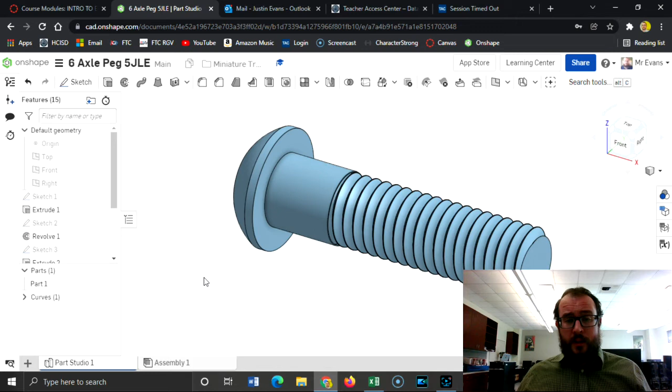Today we're going to make the axle peg. It's this screw looking one, part number 6. In order to make it, we're going to do a few new things here. We got to be able to put threads, which is the most notable one, and to put a hexagon shape, which should be pretty easy to pull off. But we're going to mix together several things that I've already taught you and a few new things on top of that. So let's make sure that you're inside of your miniature train folder.

Create a new document, of course.

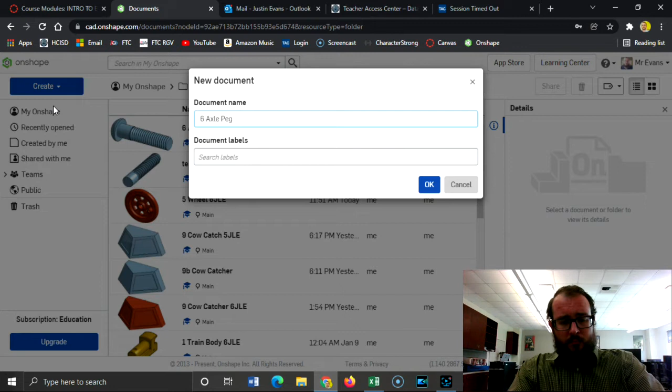Now we're going to want to start our sketch on the front view. And I want to put a circle right on that origin. It needs to be on that dot right there.

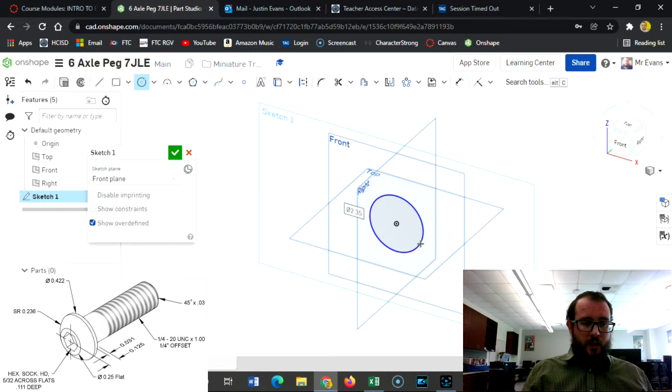Now, if I look at it, it doesn't look like it has a diameter call out, but if you look in that corner, it says 1/4-20 UNC times 1.00. That's the diameter, 1/4. The 20 UNC refers to the threads. So the length of that thing is 1 inch. So that's 0.25, the diameter. And then we're going to click the green check mark and extrude that.

It should automatically select it. Now, I extrude it 1 inch because that's the full length of the shaft of the little screw, that peg there. But if you notice, it says 1/4 offset.

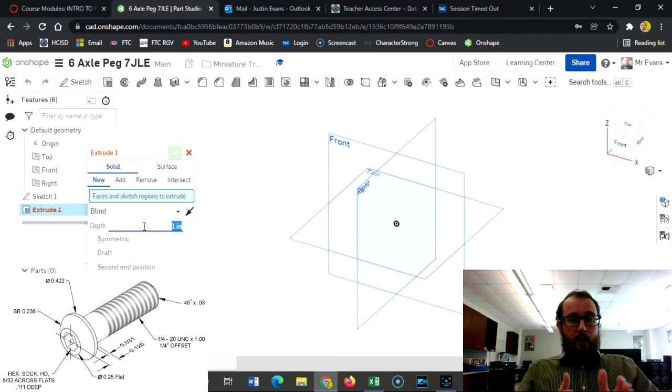And if you look at the picture, there's a part that doesn't have any threading on it. I have it right here. There's a part that doesn't have any threading on it here, and then it has the threads here. So in order to match that, let's only extrude out 0.75 because 1/4 of it isn't threaded and 3/4 of it is, and that would be 0.75 an inch.

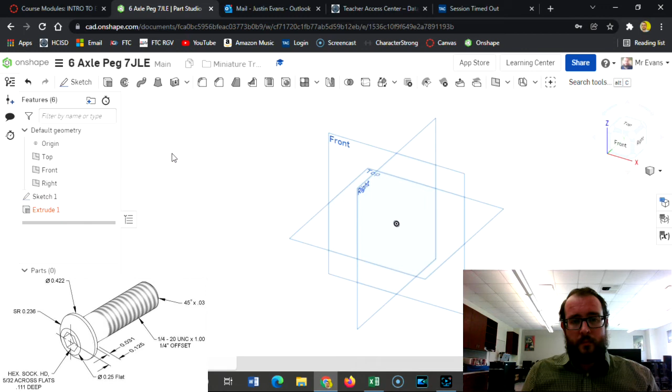Oh, I forgot to select the circle. There we go, it didn't auto select it for me.

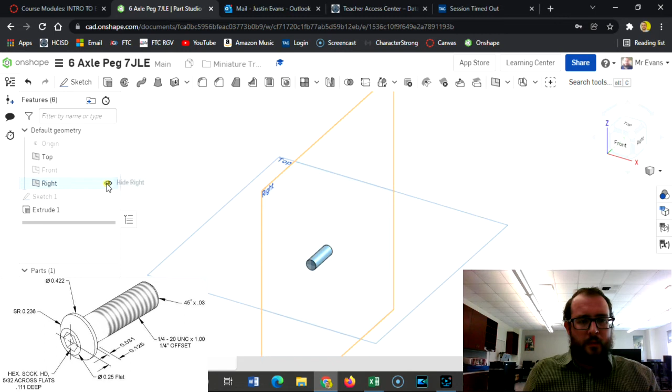I think I'm going to hide some of the things there. I think I'm going to keep the top. Yeah, I'd like it like that a little bit. So I could zoom in a little bit closer.

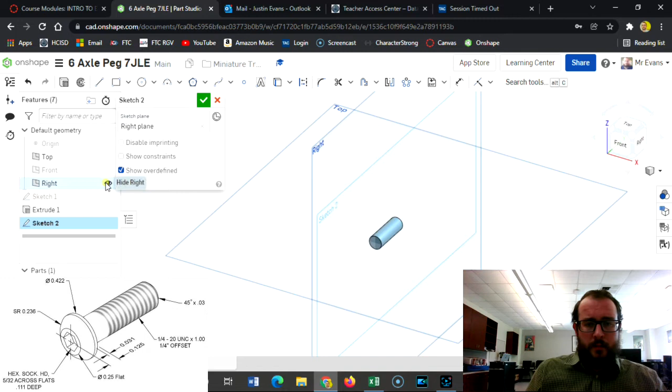Now the next thing I'm going to need to do is add the threads. So this takes a little bit of thinking. Actually, I need to bring back the right view here. I'm going to put a sketch on the right view. And I'm going to hide it again. But here's my sketch.

And I'm going to draw. I'm going to click on this. I'm going to hover over the edge, right click, and click use, so it uses that edge. And I'm going to draw a triangle.

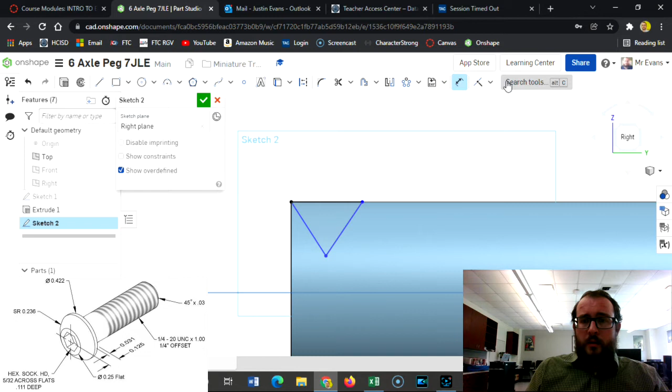Now don't let it make that, don't let it do a 90-degree triangle. This is going to give you some problems. It's going to end up being an equilateral triangle. So let me set this to equilateral by saying all sides are equal. So I click on the equal button and I click all the sides and make them equal to each other.

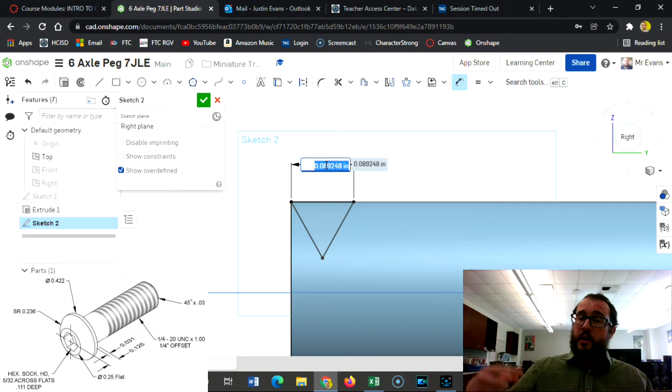And now let me tell them what size that needs to be. So this is what we need to think about. It says it's 20 UNC. That means it makes 20 spins in a 1 inch length. So that would be 1/20th, every spin would be 1/20th down an inch. So that would be 1 divided by 20, that would be the size, so 0.05.

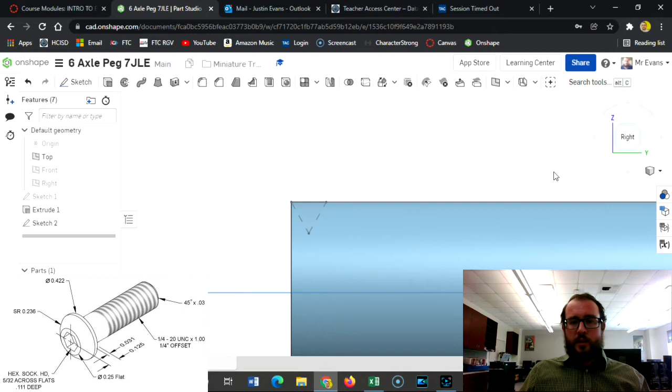There's our shape. Make sure it's clicked right at the beginning here. And then I'm going to hit the green check mark. I'm going to click the corner here so I can kind of look at it at an angle.

Now, where the little plane button is, I'm going to click the arrow down and click this button called Helix. I'm going to click on the surface here. See how it puts a spin on there?

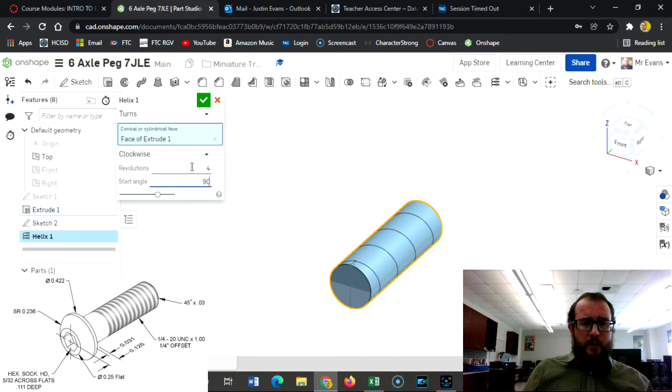I want the spin to kind of start about where my part is. So I'm going to put a 90-degree start angle. Yeah, see how it's... I'm trying to get it to start where my triangle starts. That I think I would prefer that.

Clockwise is fine. Now, how many turns do I want it to take is... So, if it makes 20 of them, and this is 3/4 of an inch, it's 0.75, that's 3/4. So I would take 3/4 of 20, which would be 15.

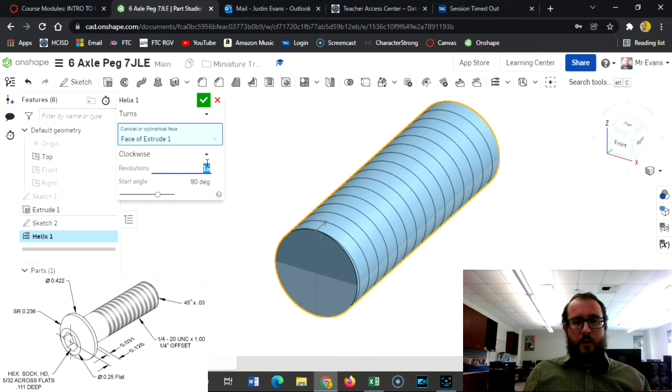I'm still going off of the 1/4-20 UNC thing. Now, unfortunately, I haven't introduced this next tool to you. It's called Sweep. Sweep takes a profile and a path, and it takes that profile and follows the path, like a spring is what we're going to make here.

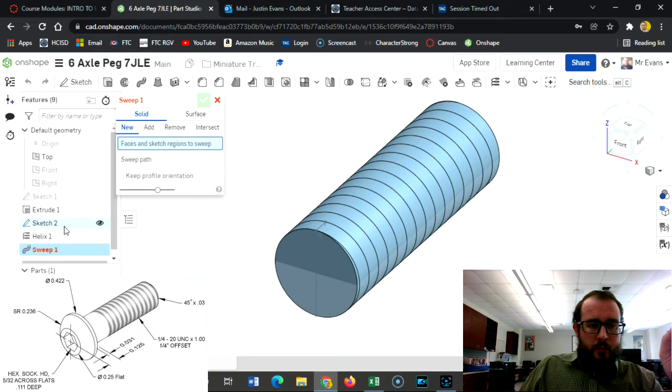So I'm going to click on this button right here called Sweep. And I want my sketch, so let me try it. Can I zoom in and get it? If not, I'm going to just click on Sketch there, and hopefully that works. And then for my sweep path, I'm going to click on the helix we just made. I want this to be a remove, and hopefully it cooperates with me.

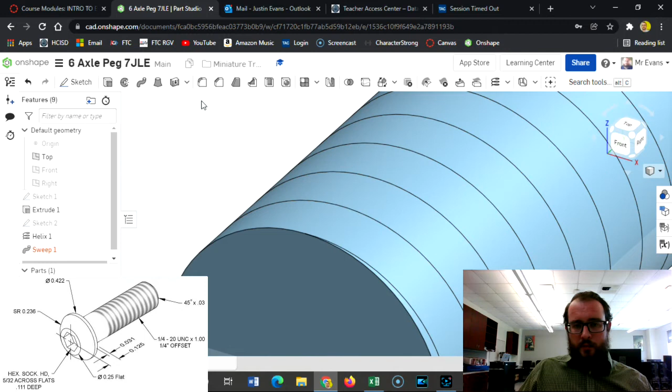Nope, something went wrong. Let me go back to the original sketch. I think I know what's wrong. I'm going to put a new dimension from here to here—it should be 0.125. And I'm going to delete this line here, I think that one might be making trouble. So let me get rid of that sweep and try it again.

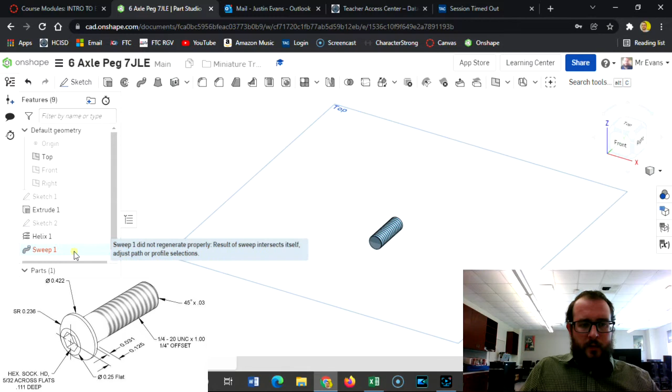So, sweep, sketch 2, and the path is the helix, and we want it to be a remove. Merge with all, maybe?

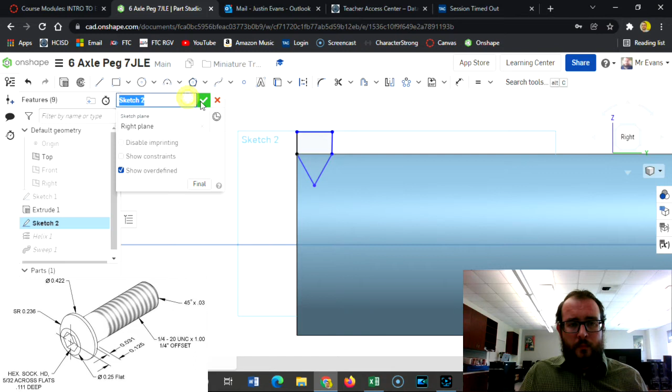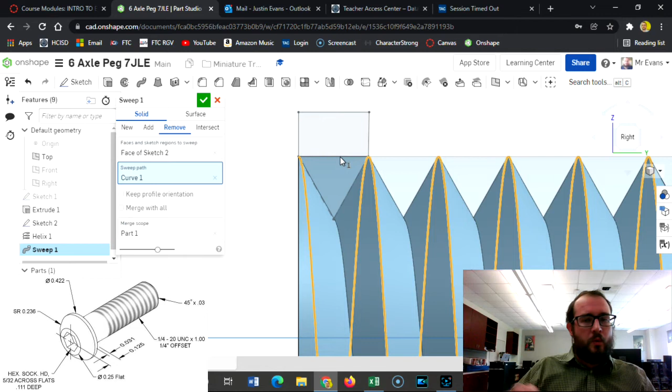Okay, so I'm leaving this in the video so that you can see that there's ways of problem solving. It looked to me like because it was on the surface, it was giving it some trouble, so I went back and added a little height to it so that it can cut out and look nice.

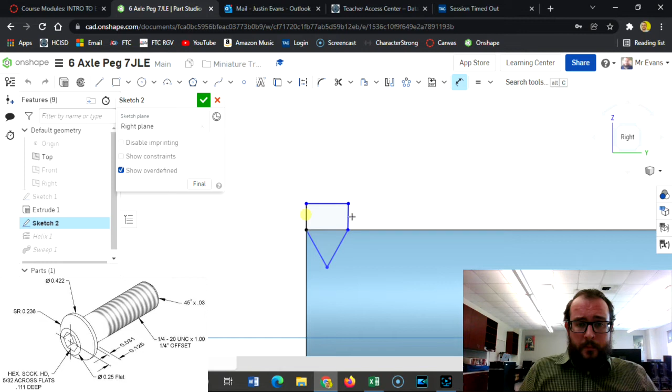Now, you can kind of play around with this a little bit, and let's say on the sketch, maybe I don't want the points to be so pointed. What if I made them—oh, let me fix that.

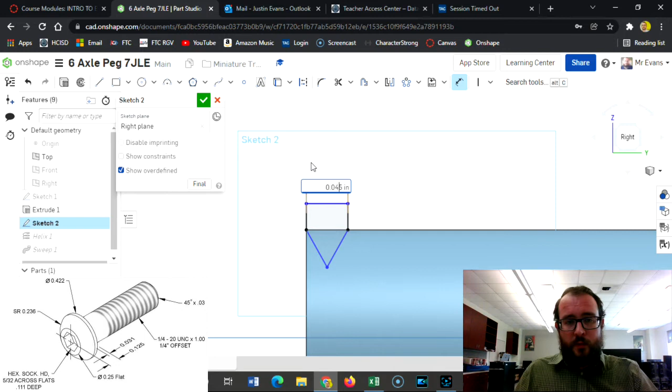What if I made the points, instead of 0.05, slightly smaller? Let's say 0.045. See, it gives a little bit of a flatter edge. So you can kind of mess around with that number in your sketch too, and change it around a bit depending on how pointed you want it to be—it's up to you. But 0.05 is for sure good.

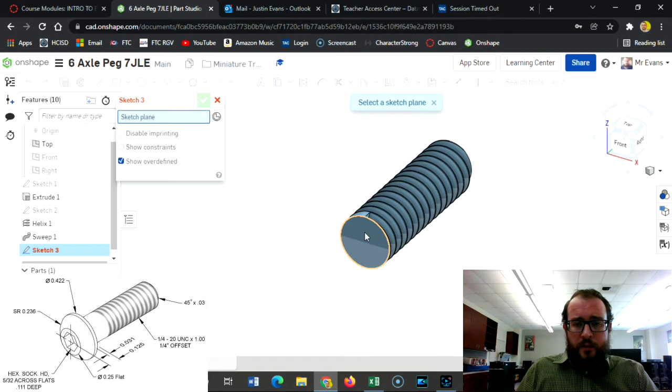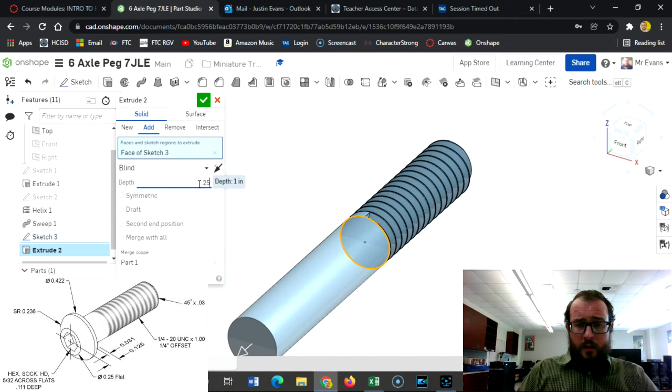Next is to create a sketch on the surface here, and we want to continue with that offset. So I'm going to get the very middle of this and make my circle 0.25. And I want to extrude that—whoops—1/4 of an inch. This is my 1/4 offset that you see with the call-out for the thread type.

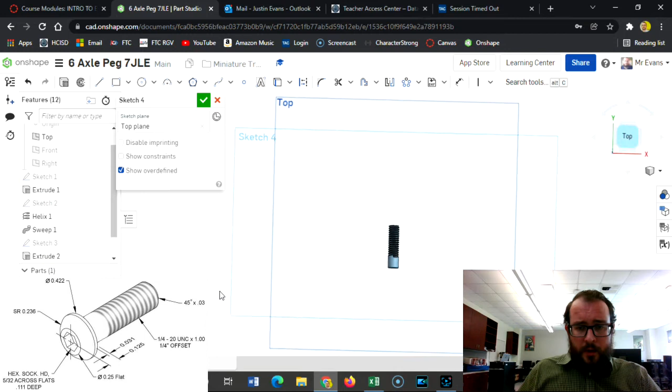All right, pretty close to being done. Now I want to create a sketch on—I can put it on the top or the right plane, I think. I'm going to put it on the top because that's the one I haven't hidden yet. And I want to click here, right click, and do use.

And I want to put a line in the middle of it. So what I want to do is make the head of the bolt, and it's kind of dome shaped. So it has a flat part going up, over, and a flat part here. Let me kind of work on my numbers. And then it's got an arch—let me do a 3-point arc again.

We'll just put anything for right now, kind of get a general shape. Oh, you know what, I need to back up on that. I made a mistake, maybe you saw it—I needed to go further out. The head of the bolt should go much further out, right?

There we go. Now I'll put my 3-point arc somewhere—I'm not exactly sure what it's going to look like, but something like that. And let me start adding in some numbers here.

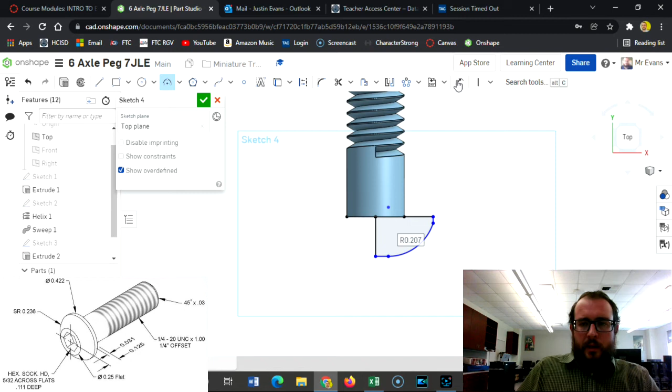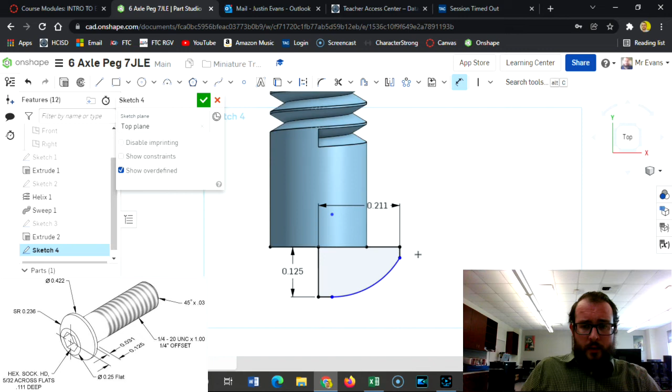The head of the bolt, if I look at it, has a diameter of 422, so 0.422, that's divided by 2 because this is a radius. All right, the height of it here is 0.125. The height of this little edge is pretty small—it says 0.031.

It says hex socket HD, 5/32nds across flats. There's a little symbol showing diameter 0.25 flat. So this right here is a diameter of 0.25, so half of that, 0.25 divided by 2, is that little flat portion there.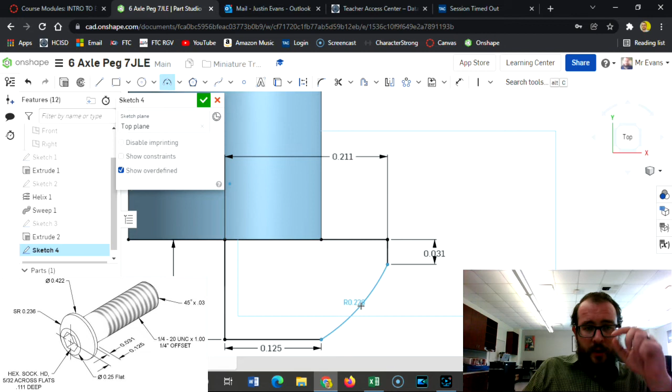I think I might have messed up this arch, so I'm going to delete it. Our spherical arc is 0.236. I'm deleting it because when I put it, I snapped it to something, and I'm not sure it's supposed to be like that, so I'm going to push it back and put our spherical radius of 0.236. There we go. Okay, I did do it wrong.

You need to understand how much power you have in a CAD software, especially any of the ones you mess with, but Onshape, just like all of them, lets you edit, delete, and change things, and it all changes live. You have to learn the program and understand how it works. That's why I'm leaving in some of my mistakes in this video, so you can see the process you go through.

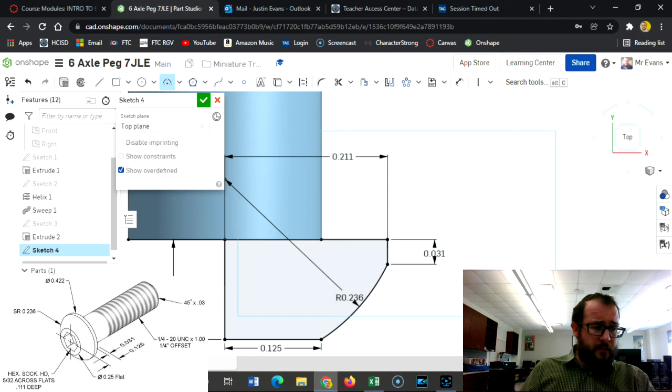I believe we have all the dimensions that we need. Now we just need to revolve it, so I'll hit revolve. I want my shape, and the axis, of course, is the middle.

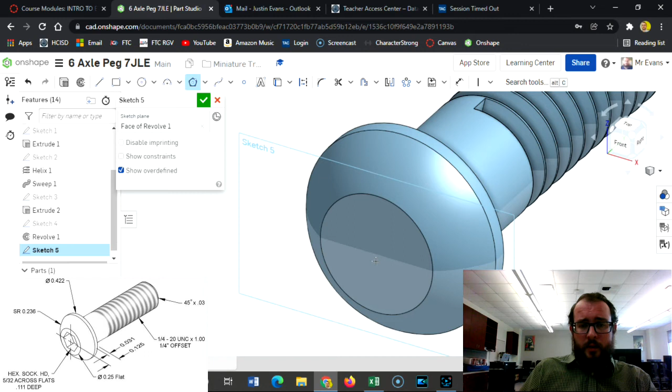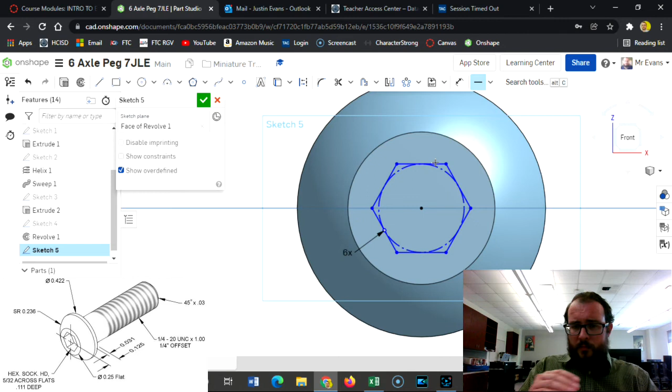One of my last steps is to add that hexagon shape. So we add a sketch here, and there's a tool for that, right here called Inscribed Polygon. I'll click that center point and go out - I want it to have a straight look, like that. And if I want it to be a hexagon, I'll type 6, enter. And I want this to be horizontal, to match the way the picture looks.

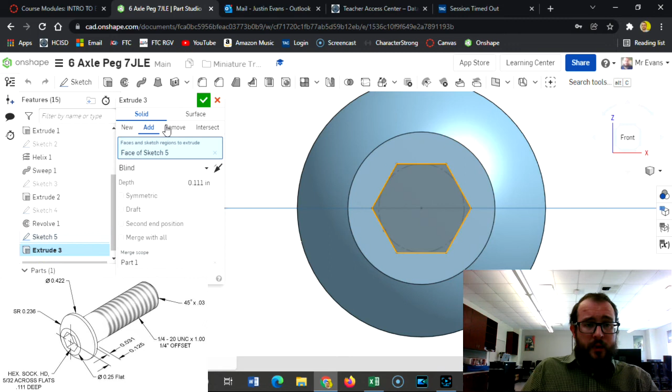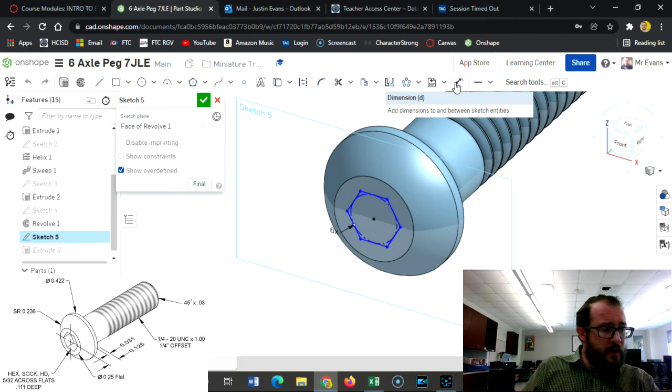Oh, you know what I did forget? See how editable it is - I forgot to put a size. This size is 5/32nds across flats. So from here to here, this is 5/32nds, that's 5 divided by 32. There we go, and it updates live.

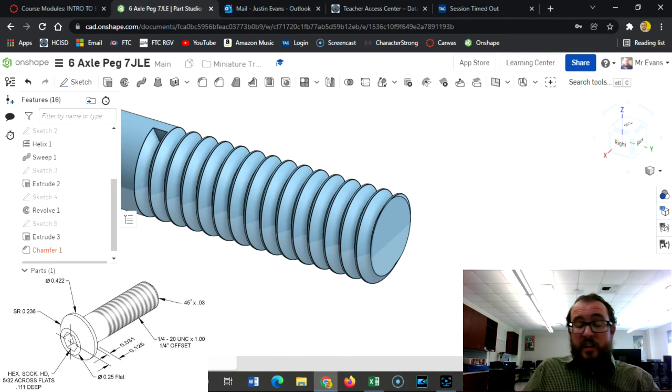On the end, it looks like there's a chamfer. I'm not sure if it's going to cooperate with us, but we're going to try to put a chamfer on the end here - it's probably not going to work. Let's see. It says 0.03. It doesn't like it. We can kind of cheat the system here and create a sketch on the top view.

What I'll do is make a triangle. I want to get the center of this, so I need that - a line going out from the center. I'll need to right click, use that line there, so I want a line going out this way.

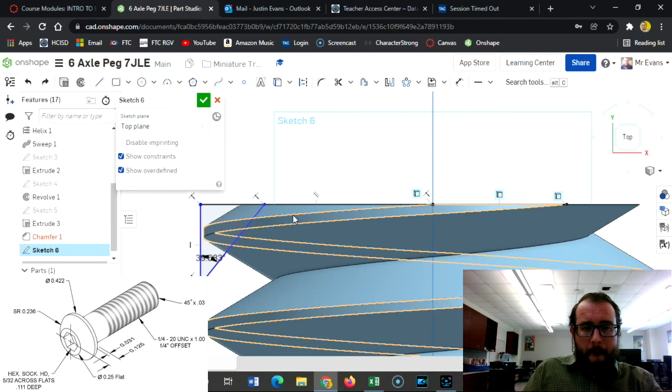I want to make a chamfer. I want the angle in here to be 45 degrees, like it calls out - 0.45. Oops. Let's see why it didn't cooperate with that. Oh, I think I put 0.45, I didn't need to delete that. And we want that length to be 0.03.

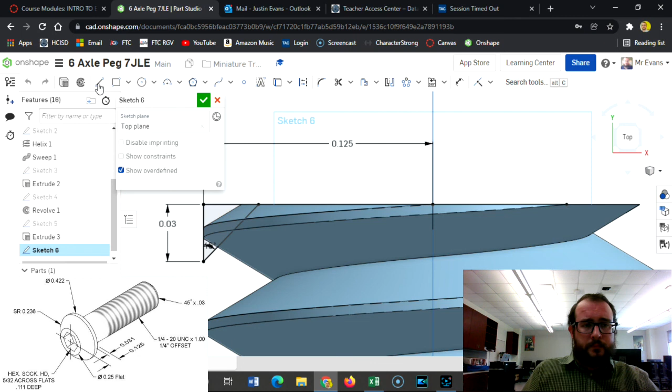And we want this here to be a dimension that is the same as the radius of the screw, so that'd be 0.125. And then we're going to hit revolve, get that, hit remove. The axis is going to be - oh, we don't have a center axis, we need a line in the middle. There we go, that will work, and we kind of get that look a little bit.

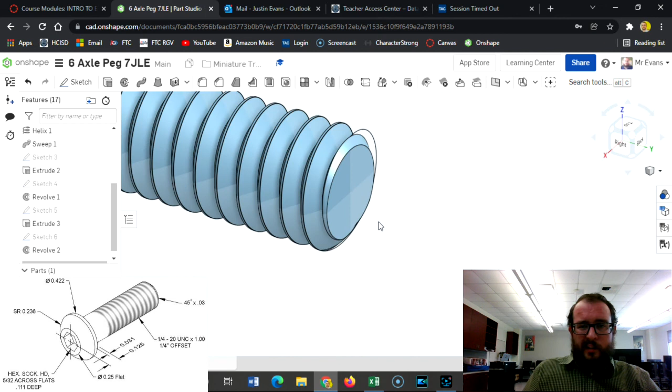If I lost you on that, sorry, I'll try to help you out. If you're really getting stuck on that chamfer, you can ignore it - it didn't really do much. If I get rid of that, see how little it changes. So if you get stuck on that chamfer, just toss it out, you don't have to use it. But the other parts you do.

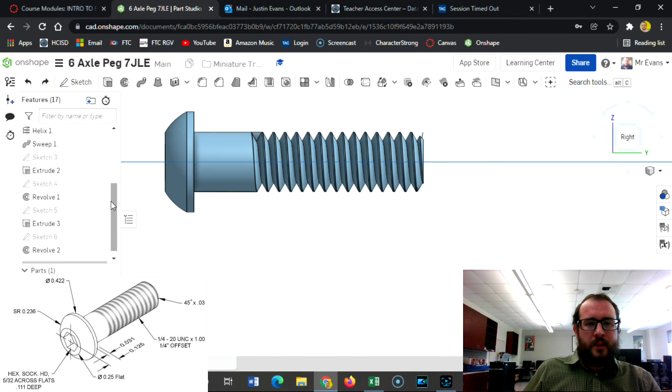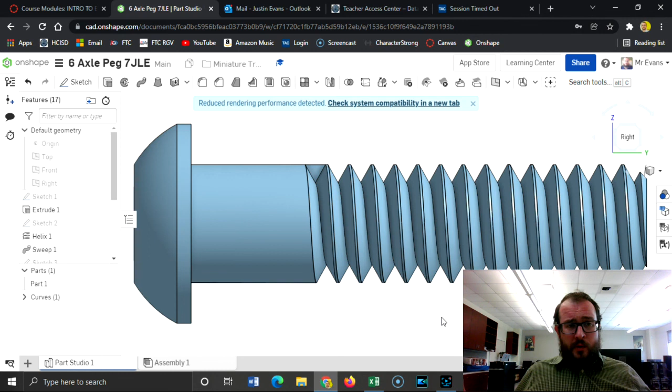You need to get the spiral of the threads, the head of it, the hexagon, and so forth. Let me know if you're getting stuck with that sweep, and I can help you out - it can be a little bit problematic, but I can help you fix those. If you're really getting stuck, feel free to ask anyone for help, including your teacher. And that's it. Let me know when you're done so I can check it off the list and add it to the grades. Thank you.